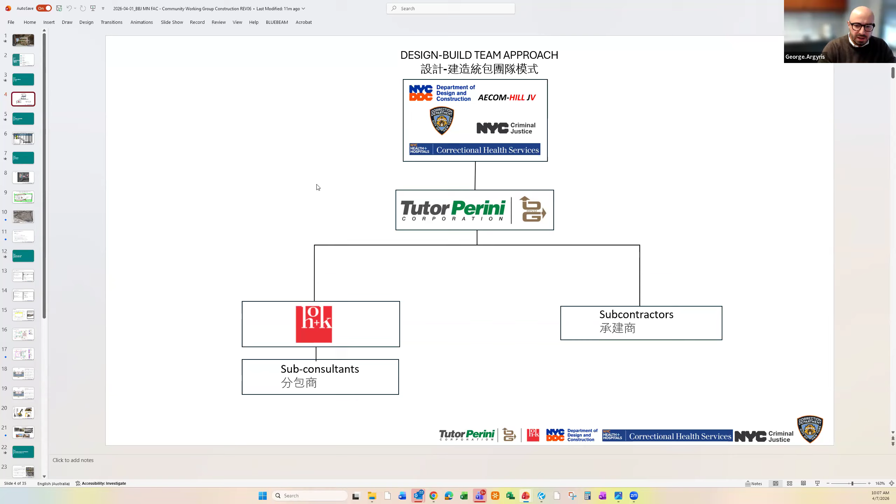So starting off, we have Tutor Perini O&G, which is the design builder. We're representing DDC, the PMC, which is AECOM-Hill, Department of Corrections, MOCJ, and Correctional Health Services. HOK is our architect and engineer of record. And of course, below that, there are multiple sub-consultants on the design side, and subcontractors on the construction side.

Looking at the project schedule, we're going to focus on 2026. Right now we're going into construction phase. In the next 2 weeks we're going to start preparation work for our SOE, or support of excavation, which really starts in mid-May. This preliminary work will include demolition and removal of old remnant structures that are in the way of the new building. Later in the year we'll look at some caissons, and then setting the baseline for dewatering.

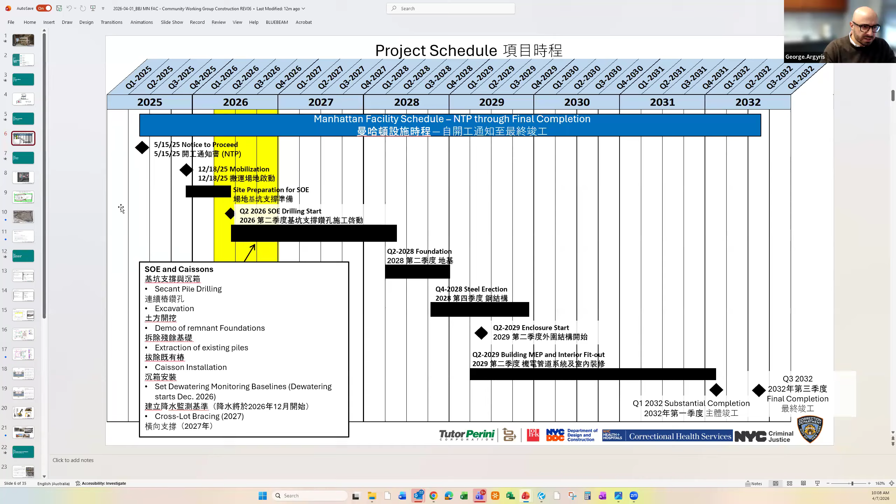This is a topic we discussed last time we met. The project location, everybody's familiar with this. We are right in the heart of Civic Center and Chinatown, between Centre Street and Baxter. To the north we have the Chung Pak building, and to the south we have the courthouse.

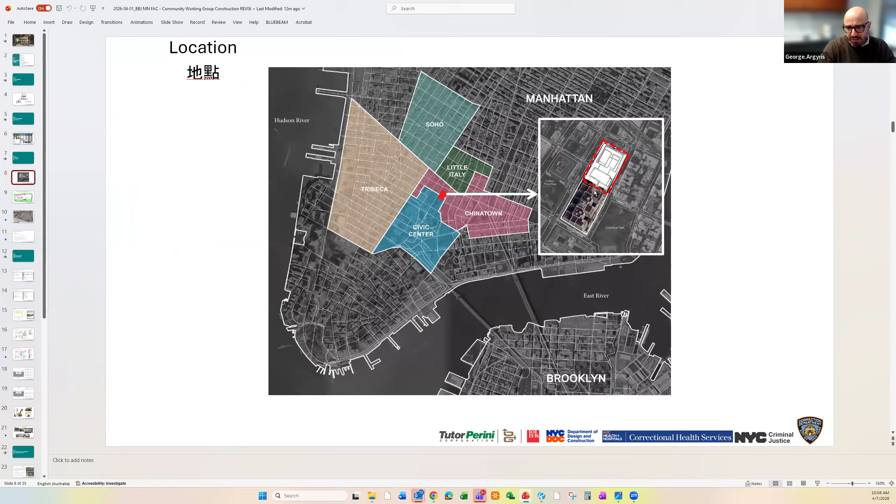This might seem familiar to those who joined us last time. We have our pedestrian route here surrounding the site in green, and of course our site perimeter here, as you can see.

Walking around the site from Centre Street, moving north, we have the courthouse Sallyport, which is fully functional. We are coordinating with MOCJ and the courts on our construction traffic and their operations to keep that as seamless as possible. Their operations run almost around the clock, so it's imperative that we coordinate with them.

Our deliveries, as the main artery supporting our site, will go through Centre Street. You can see this arrow going into the site, where we've captured one traffic lane, going up north and exiting back towards Walker.

As we walk around the Chung Pak building, pedestrian traffic remains the same. Going around Baxter, it's very similar - we've taken one lane of traffic to support our logistics efforts. The pedestrian traffic goes across the street on the eastern face of Baxter and down towards Bayard.

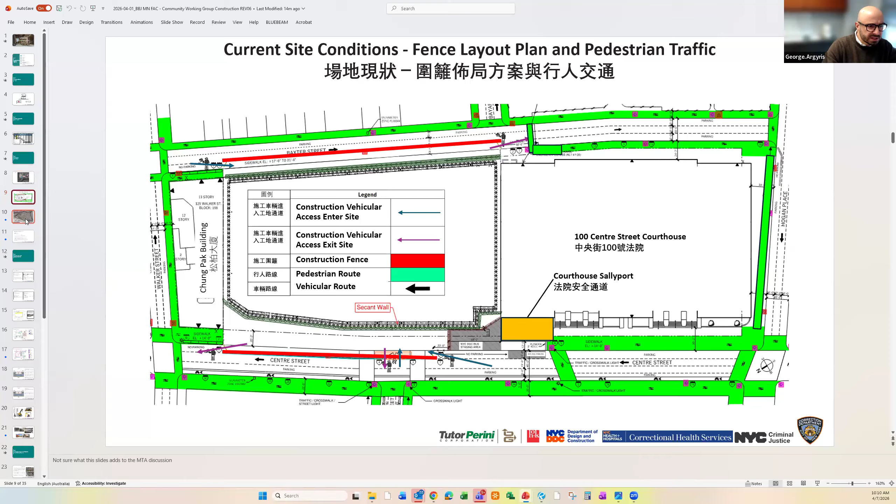All right, we'll go to the next slide. This is what our site looked like as of a week ago. We've been doing site preparation work - you can see some old foundation elements here, some concrete that's been chopped. This has since been removed, and we're really starting to grade and prep the site for production work.

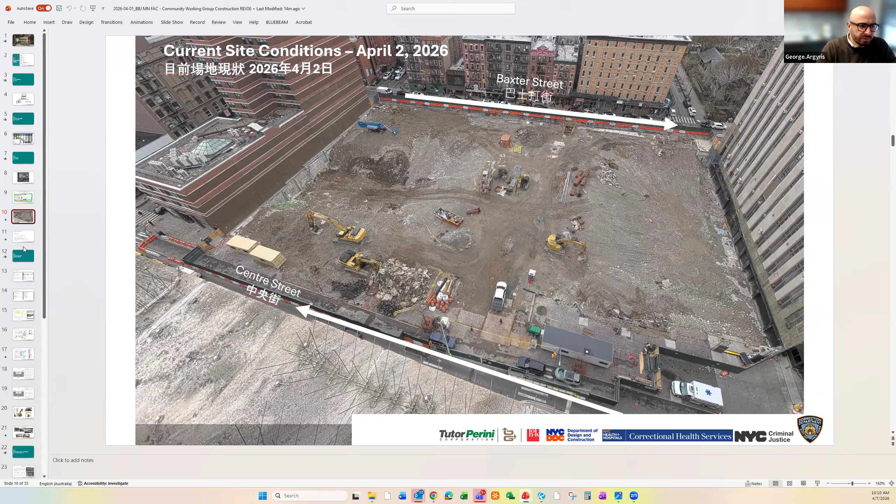So what's been completed to date? So far we've been working Monday through Friday, 7am to 6pm. We've done a lot of site investigation activity - test borings, test pits for our geotechnical design. We've also conducted load testing in the past couple of months to make sure the existing piles match our initial findings.

We've done some cutting and capping of existing utilities on Centre, some surveying, and of course Con Edison has been very active in and around our site with their decommissioning work on their infrastructure.

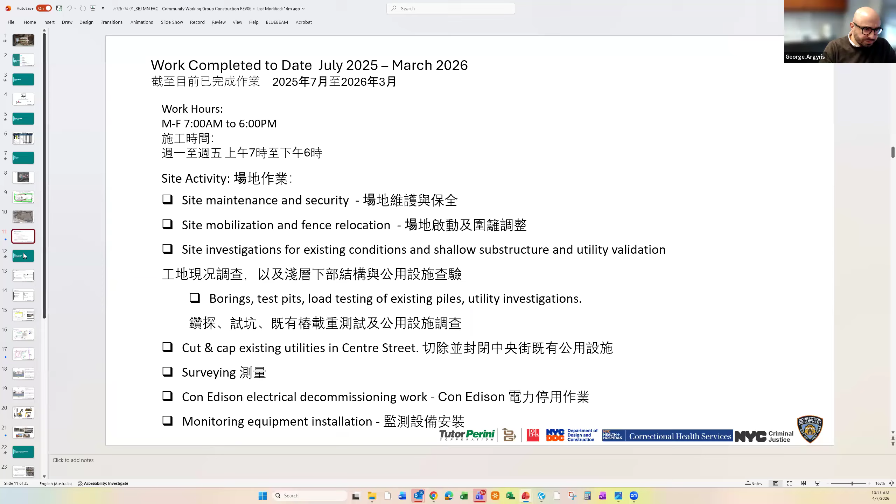Moving on to 2026 - starting in the next week or two, we're going to do preliminary work, which will involve removing portions of the old building that are in the way of the new foundation and the new SOE. That will happen starting next week with mobilization.

Work hours will be from 6am to midnight, although the majority of the production work will happen between 7am and into the evening hours. The last couple of hours in that shift are really to demobilize and prep for the next day. We also plan to use Saturdays, 7am to 5pm, to make up for rain days and prepare for the next week.

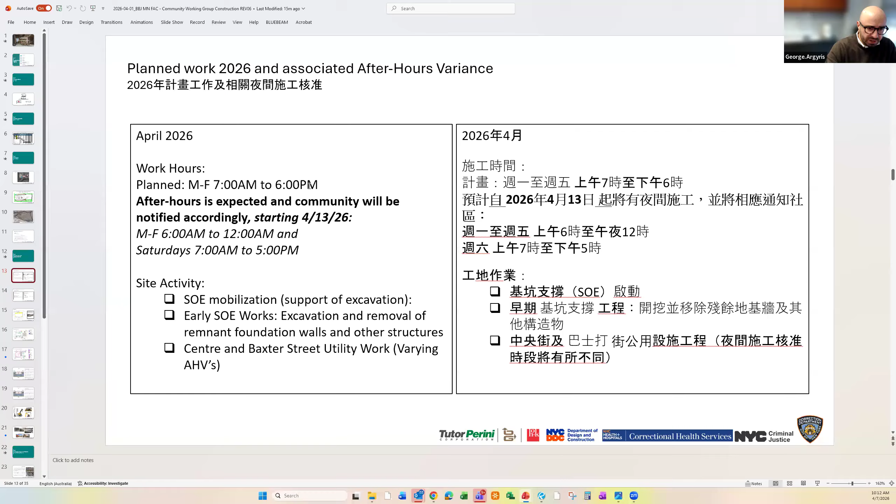Same goes for May onto the rest of the year, same working hours. In May is when we really plan to start our support of excavation, which will show a big difference on site in terms of the equipment mobilized. I'll show you exactly what that equipment will look like. That will enable us to start secant piles, excavation, and later in the year, caisson work.

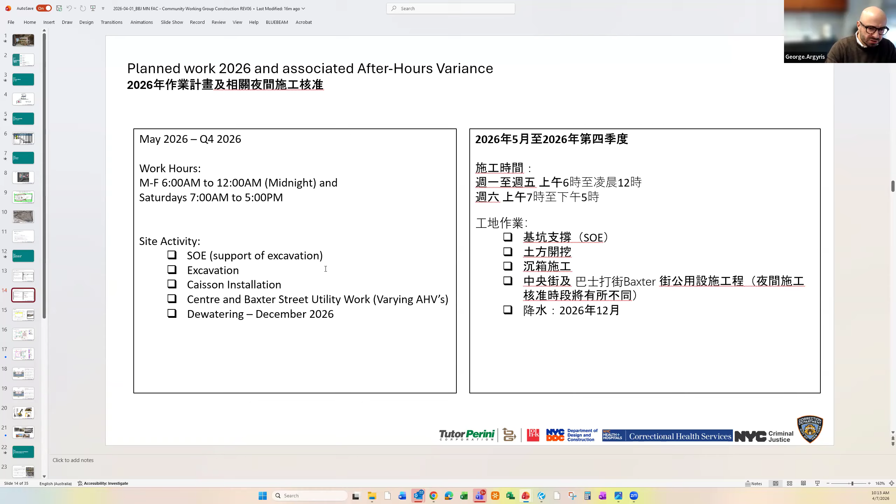There's also some remaining work for utilities on Centre and Baxter, and we should be completed with the majority of this work by the end of summer. For dewatering, we're going to start baselining sometime in late summer, but the dewatering operations really start at the end of the year, around December.

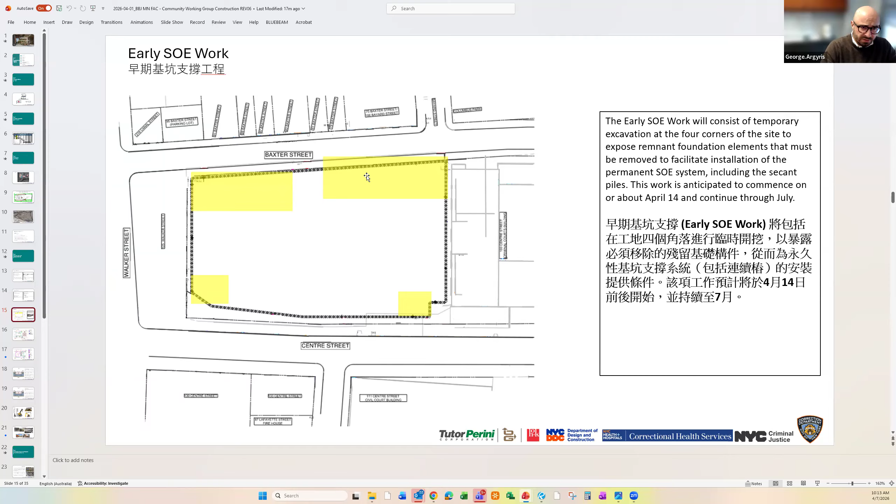Moving into May, this is really when the major operations will start. You can see here a lot more equipment on site. We have drill rigs. I'll show you what that physically looks like in just a moment.

But we're starting from the north and kind of moving south. There'll be drill rigs, service cranes, and some loaders, which I'll show you what that will look like. We have already mobilized one trailer, but there will be additional trailers on site to support all the workforce that will be doing these operations.

No changes to the gates. Here we have our gates coming up near the existing sally port. To minimize impact, you can see here we've added a soil removal route. So any soil that we're removing as we're excavating, we want to bring it mostly from this White Street exit and go right out onto White Street.

We have been coordinating with DOT in terms of the road work, and we'll get into that in a couple of slides here. Same with Baxter, no change from what we previously presented. We have our gates here on the northern end of Baxter and here further south going towards courthouse.

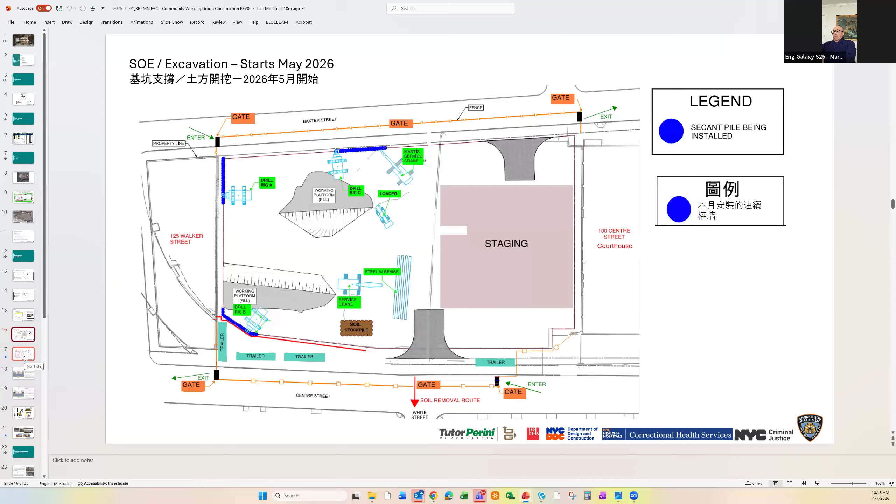Once we go towards the end of summer and approaching the fall, we plan to start caisson operations. This is what I foreshadowed earlier. By that point in time, the secant piles will be towards the south of the site and will be really in the center here, installing caissons.

What these caissons do, these are part of the foundation. They are drilled cylinders that go down into bedrock to secure the foundation structure and the building into the earth. So the operation is moving north to south.

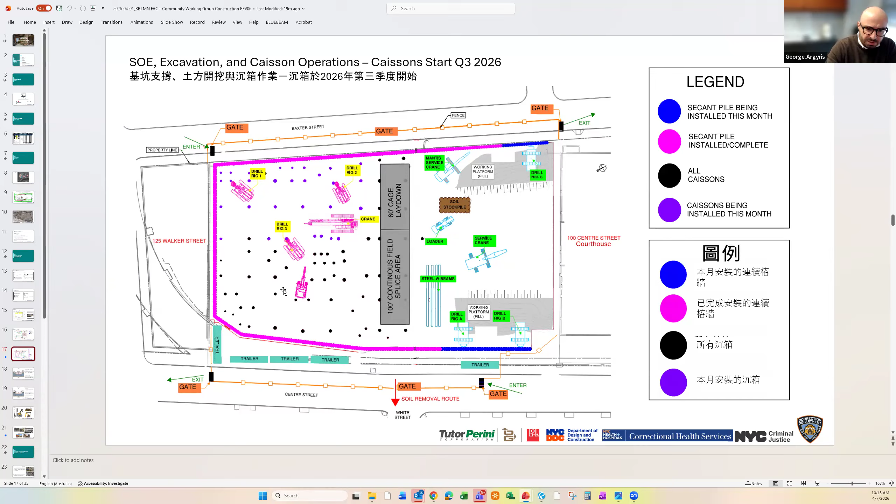This is a familiar image we presented previously as the dewatering operations, just in concept. This is a pretty common practice when we do deep excavations or even in some occasions tunneling.

We will be wanting to maintain the water table all around the site, but really within the site footprint, we want to bring the water table down so we can access certain elevations to install both caissons and concrete.

So we'll have pumps set up, we'll have redundancy in that system, and we'll be constantly monitoring that. And we'll show you that in just a little bit.

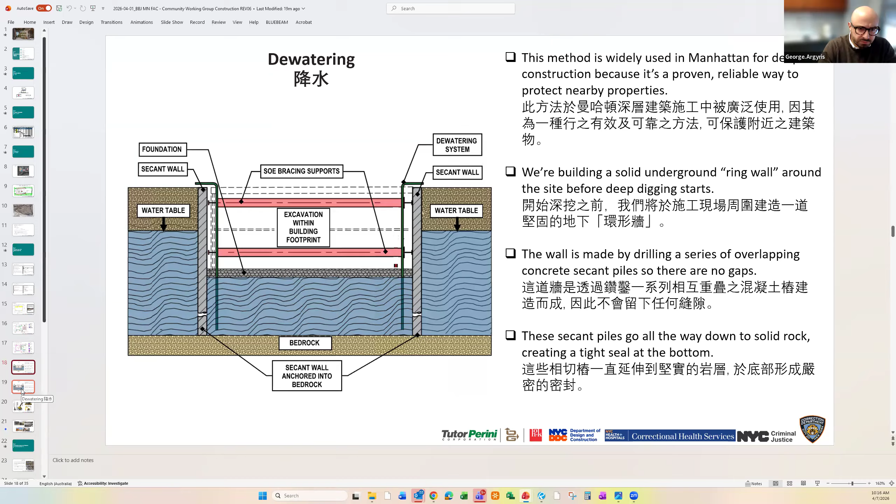One thing to note here is this bracing that goes across. Once we start excavating, we'll be installing this cross-lot bracing or lateral bracing to keep the support of these SOE walls here on the side.

And these, it's important to note, these SOE secant pile walls, there is no structural force from the building here. This is just to maintain the water table in the exterior of the building.

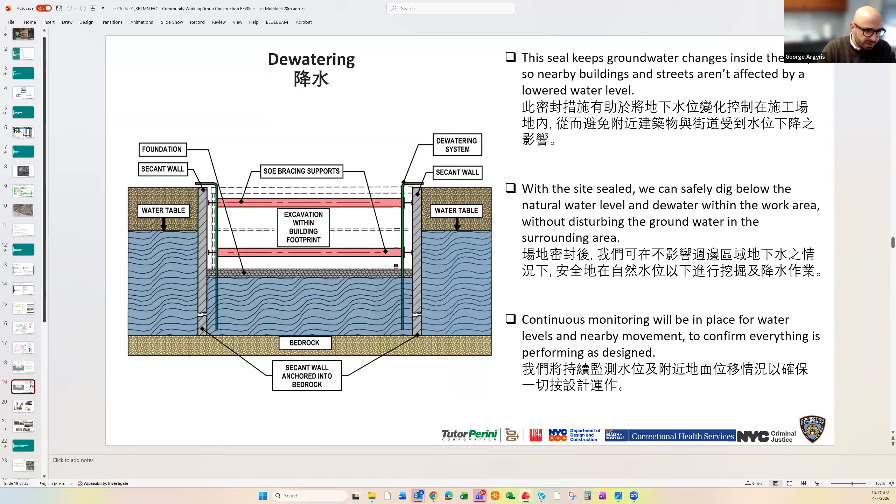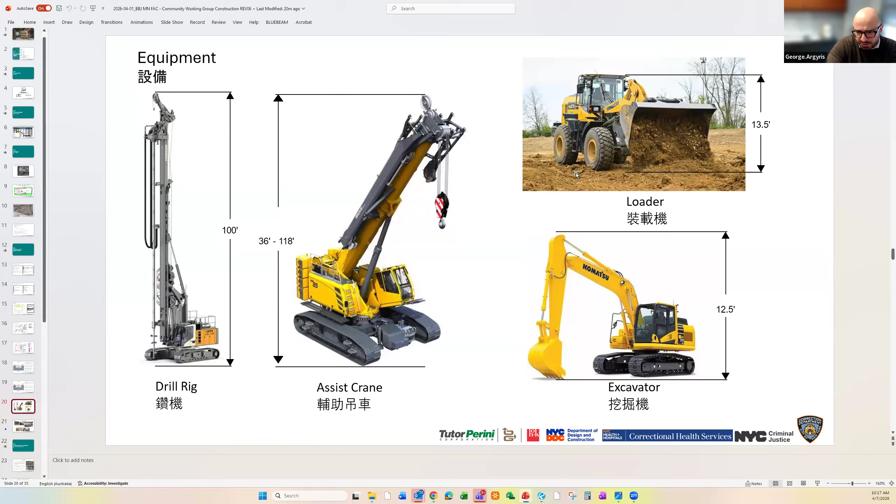Here are some of the equipment that we'll have on site. This is the drill rig. We'll have about 3 to start, and then probably around the fall, you'll see about 5 of these, about 100 feet tall. There'll be assist cranes to support all the heavy lifts, and of course, loaders and excavators to be moving earth around.

Here are some examples of the major deliveries that are expected to come. These are the huge cylinders that are part of the secant walls, and later on the caissons.

These will be delivered to site on a regular basis. Same here with rebar or reinforcement bar that goes in those caissons.

These cross-lot bracing that we mentioned earlier, this is going to start in 2027, but we wanted to keep this on here just for awareness. And of course, concrete operations.

There's these caissons and these secants get filled with concrete. So there will be concrete trucks coming in and out of the site, and there will be pumps helping to distribute that concrete in those areas.

Of course, there'll be washout stations within the site. So before any of these trucks exit the site, we'll make sure they're clean so we don't make a mess on the streets.

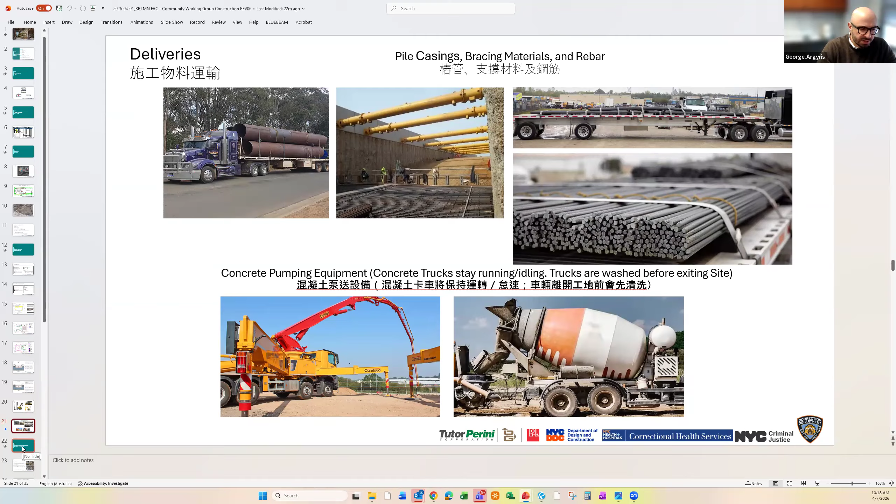More importantly here, community impacts and mitigation. The most important thing and foremost is the site safety and the culture that we set, both as a company and to our client and to all parties that are involved.

We take safety very seriously. We have a very strong track record, not just in New York, but throughout the country. We make sure that this culture, this safety attitude is embedded to all the workers and all the visitors.

We have safety stand downs very often just to keep everybody up to date on the latest practices and what's going on site. So you will see that happening quite often.

So before anybody steps foot on site, they get trained. They have to have certain safety credentials so they can identify any potential risks for safety.

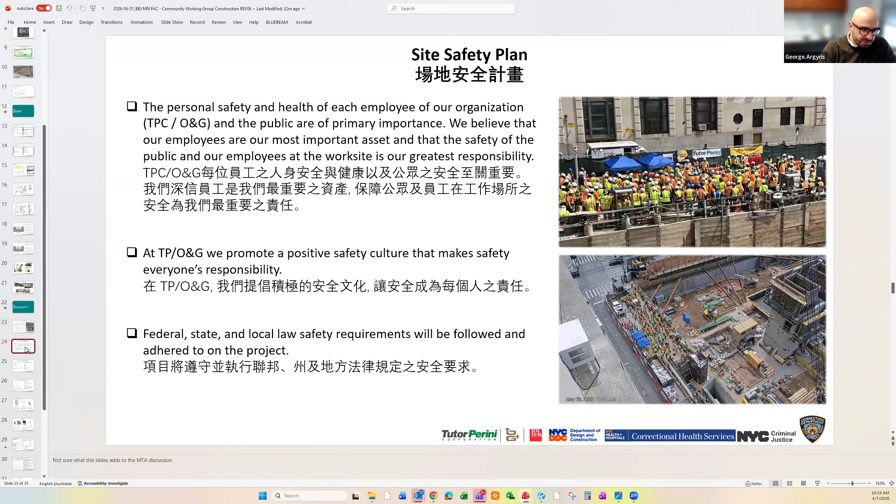Looking at project monitoring, of course, we have the tunnel that's running through Centre Street. We go through very rigorous R&D here and design. We have submitted our plans to MTA, New York City Transit. Those have been approved, and we're now in the final stages with DOB in getting those approvals. There's a very robust monitoring system in place in the tunnel.

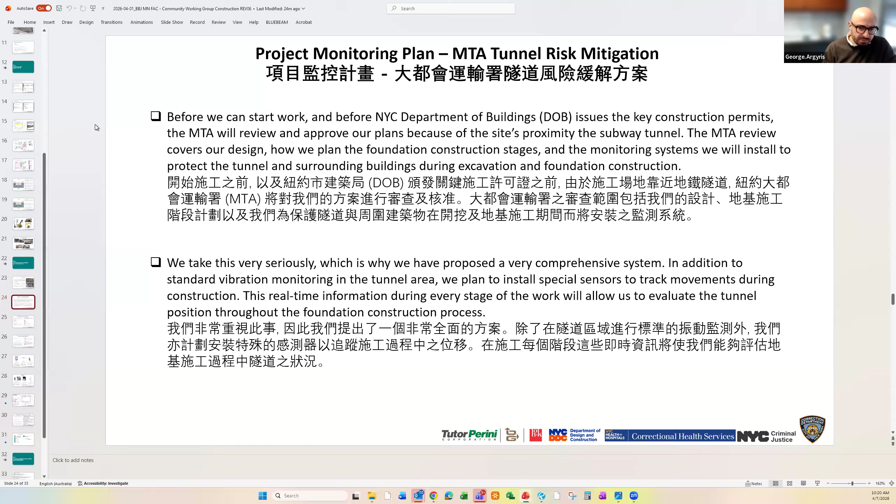It consists of vibration monitoring, monitoring of movement with certain types of sensors, which I'll show you in just a moment. And really critical, as this is ongoing construction, will be right against the tunnel. So we want to catch any type of movement well ahead of any danger. So that will be in place.

Of course, the monitoring extends way beyond the tunnel. We have surrounding buildings that we're monitoring for the same parameters, vibration, movement. There's certain criteria that are set where there's an alert, and if there's just a slight difference from baseline, and then of course a limit where we stop the work in that particular location. We investigate if it is something that's caused by our operations. We try to mitigate, and we do not start until that is addressed.

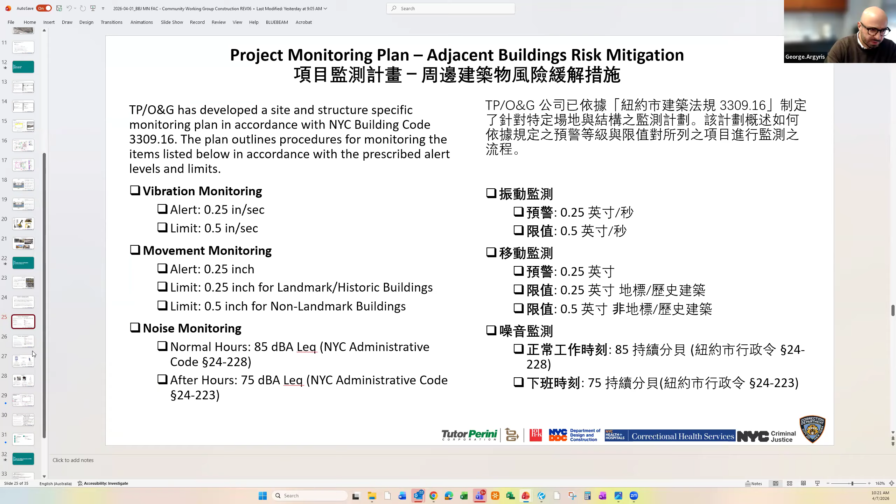Moving on to noise monitoring. This is a very important monitoring plan in terms of the community. We're monitoring during the day at 85 dBA over an 8-hour average, and at night at 75 dBA over that same average period. Again, the alert criteria goes for that as well.

We have dust monitoring in place, and once we have dewatering operations, or a little bit before, we'll have groundwater monitoring. The groundwater monitoring, like any other monitoring, we set a baseline, but in this case, because we're dealing with hydraulics, and since water is very fluid, excuse the pun, we want to set a baseline over an extended period of time. So we have some very strong and accurate alert criteria. And even once we start the dewatering, we'll be reassessing that baseline as there are different fluctuations in water on the outside, whether it's a storm, whether it's the tunnel pumping water out, and any other environmental factors. So we'll be continuously monitoring that baseline.

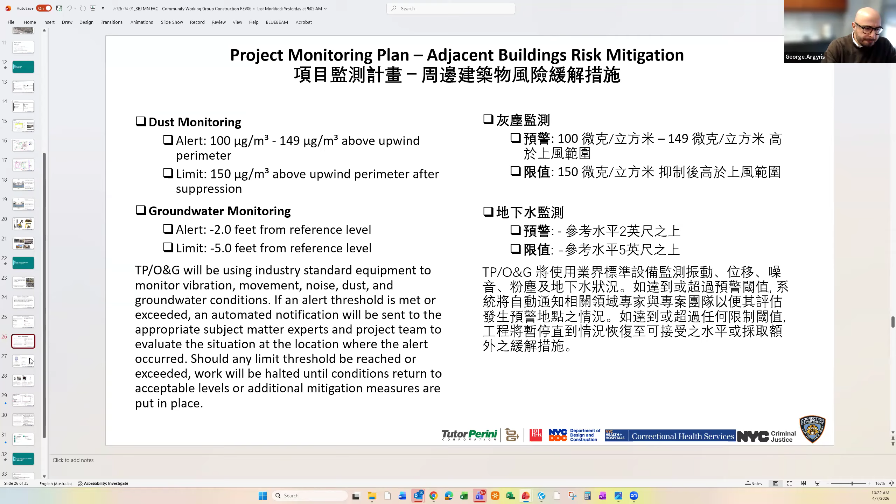Here are some examples of the equipment. This is a vibration monitor. There's a crack gauge, sound level meter. We have here these automated total stations which communicate with these prisms. They're constantly shooting back and forth to each other, communicating to advise of any type of movement. And here's a dust monitor with all the sensors on it.

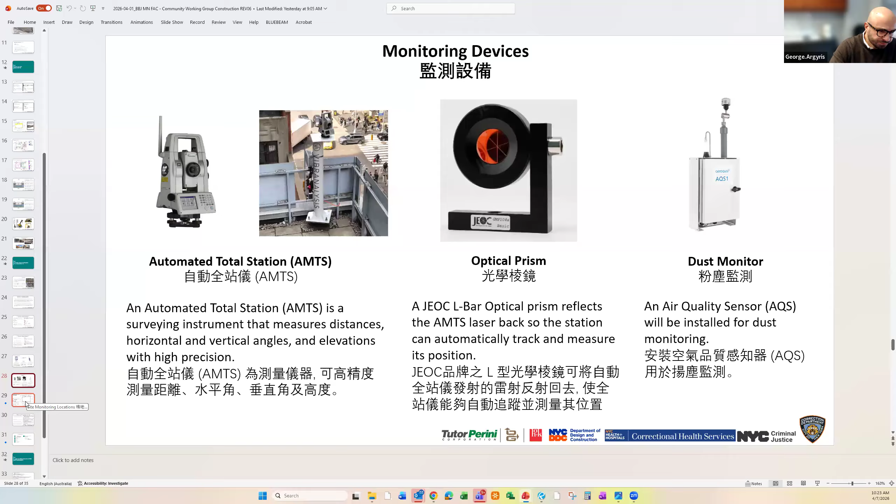Here's the monitoring locations. They are distributed throughout the perimeter of the site. Of course, we have the properties on Baxter, on Centre, and we have Chung Pak to the north, which we should update because we've added a number of monitors since we last met in this building, and of course in the courthouse. So it's a pretty robust system. You can see here, this line represents the tunnel. So this is Centre Street underneath.

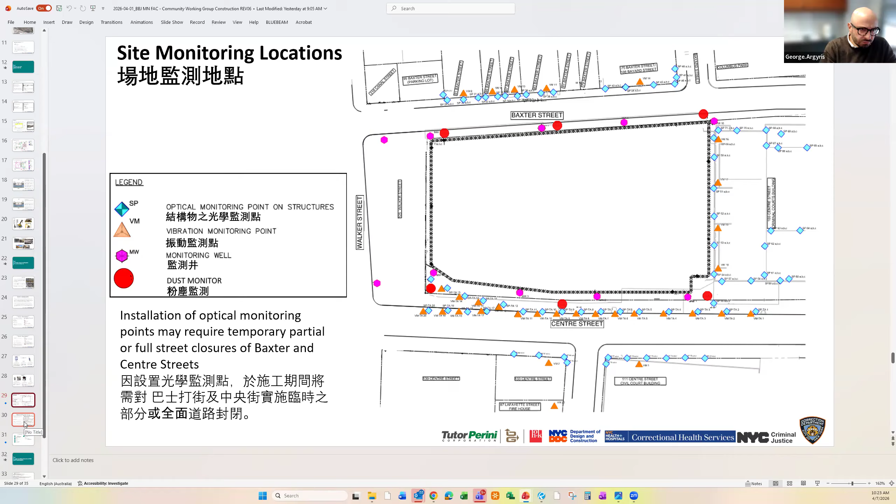Dust and noise mitigation, not just looking at the monitoring, we want to really apply mitigation to the equipment and the practices we use on site. In terms of dust control, we're going to be spraying constantly on site. We're going to be covering any type of loads that are coming in and out of the site with material. Wheel wash stations, both for soil and concrete.

And for air quality and noise monitoring, idling rules are in effect. No idling except for the concrete trucks because they have to keep working so the concrete doesn't cure. We will be blanketing engines as needed for our equipment. We're looking at putting up temporary barriers and shielding in certain areas of increased noise. And we've already conducted studies for specific pieces of equipment on other job sites to make sure we don't have the same issues here.

So we'll be communicating any type of higher noise activities to the owner and all the stakeholders. And those reports will be going out monthly.

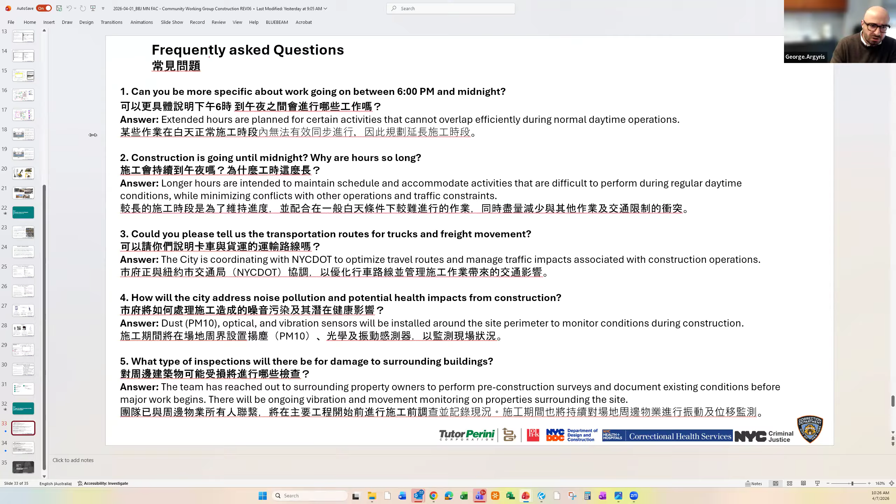The main answer here is it's a very aggressive schedule. We have dates that are mandated by law to meet, so we have to really compress the schedule. This is a design-build, so even the design is ongoing as we construct. So that's the main reason.

The second reason is just operationally, there are certain activities that cannot overlap during the day, and that's more due to equipment and safety and how close they can work together.

A good example might be the use of the crane during the day to erect, whether it's steel or curtain wall, which might not be able to run concurrently, so we might have to run some curtain wall work in the evening hours or shifts. So it's really a fine dance between overlapping certain activities that use shared resources and not wanting to create any safety risks on the site.

Could you please tell us the transportation routes for trucks and freight movement?

Right now we are dealing with the Department of Transportation. They've been working very closely with us in terms of the surrounding projects and what the construction zones are on those roadways. So we're coordinating with them, and we're coordinating with the courts, with the Sally Port next to us, to keep the congestion to a minimum.

But the exact routes we have not pinned down yet, as we're still in the final phases of buying out certain big contracts for hauling out dirt and bringing in concrete. So we'll have better answers in the later months as we finalize these subcontracts. But the most important thing is that we communicate with the Department of Transportation, and we're all dancing to the same song here.